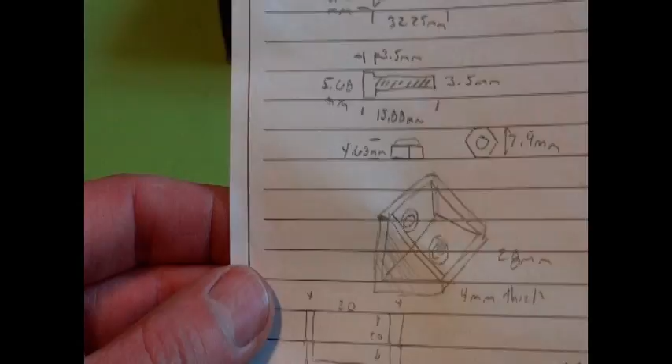So I wrote down my measurements up here so I know how big my holes are going to be, and how big the flange is on the wood screw. And I made a little sketch of the bracket I'm going to try to make. It's just a little right angle bracket with some sides to make it a little stronger. And I just came up with some measurements.

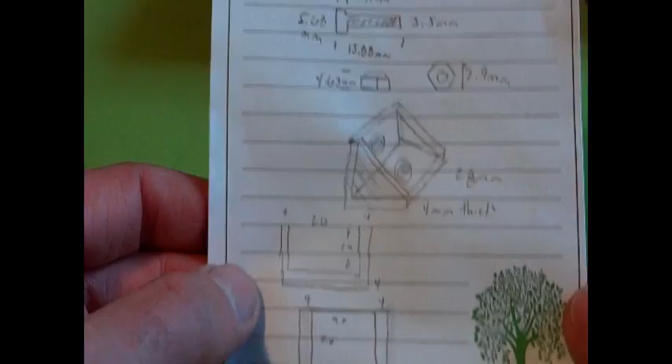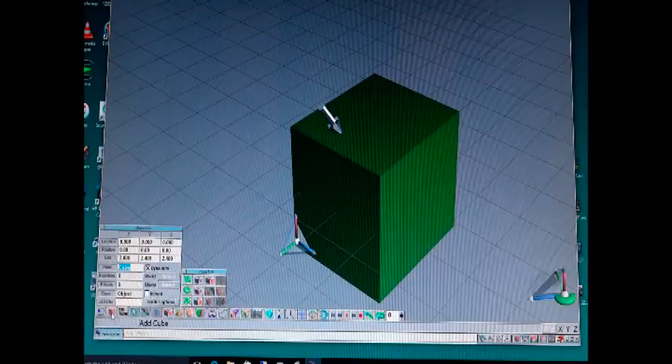Okay, now we make the object more formal by entering in some of the coordinates. 2.8. So that makes the basic shape of it. Then I'm going to cut away a section of it to make the indent.

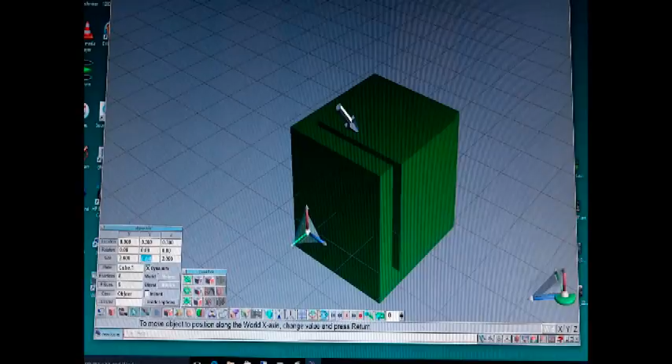Now we can subtract this. So we take the first block and subtract it from the second one, and now we're starting to form the bracket.

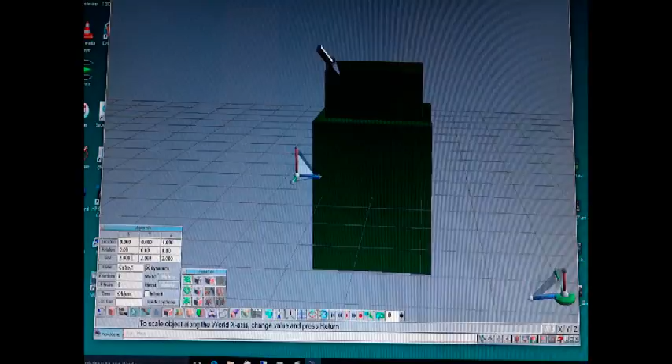Next part is to make the nice angle sides to it. So we'll add another cube, nice and big. Make it so we can see it a little better.

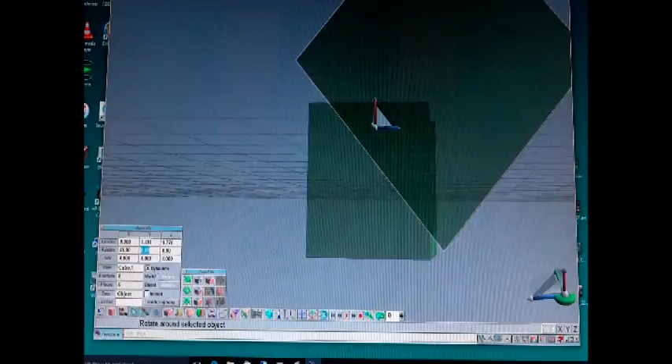I want to rotate this around to get that angle. I want to try to get these to intersect it nicely. Slide it back some more.

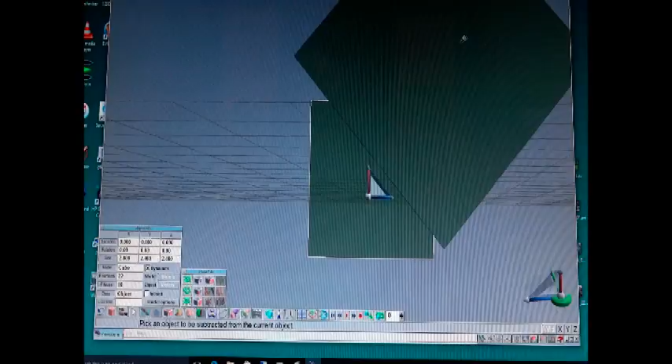This looks good, so I'll subtract that away too. Now you can see it's starting to form that shape that we drew a while ago. Just need to add the holes.

So this is the software that's used to print the parts. I loaded 2 of them because it just takes a little bit longer to print 2 than 1. You can kind of rotate around and see how it looks. There's just 2 back to back.

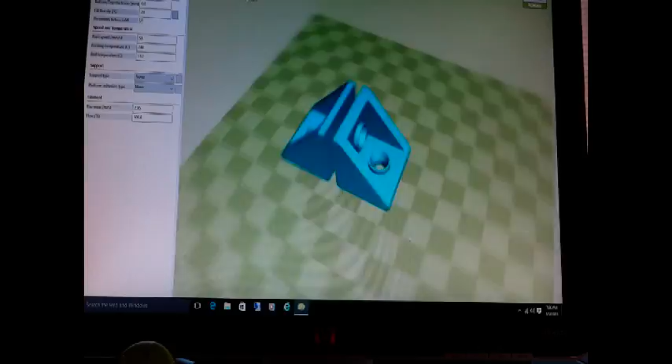But one thing this software does that controls the printer is it slices the 3D model into little slices. If I change the view here, you can see the little layers that will come printed out. So it starts at the bottom and starts working its way up.

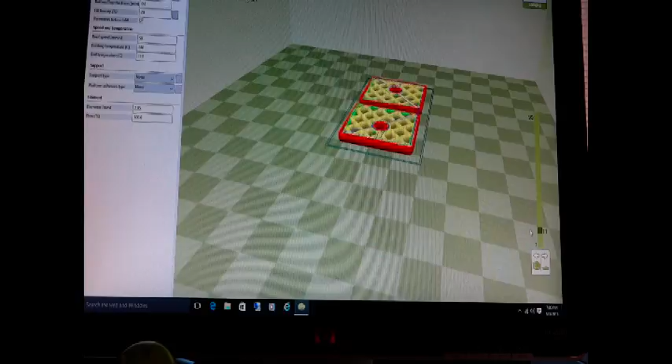So there's solid layers on the very bottom, but then it starts making a little pattern here. It's actually hollow, so it doesn't use a lot of plastic, but it's still nice and sturdy. So as it prints, it'll just work its way up, just like that.

Alright, starting to make some progress. Starting to look like a bracket finally. Let me zoom in here a little bit, maybe you can see better.

That's better focus. You can see the flange is printed out for the wood screw, and now it's just working the sides up, and hopefully it'll get a little higher and make the next hole for the other angle.

Alright, it's making progress. Back wall holes starting to take shape here. Let me zoom in a little bit.

It's probably 2/3 of the way done. It's making progress.

Alright, getting pretty close to the end here. See, the hole's completely finished printing. Got both holes there. Now it's just working on the very top of it.

And you can see we got 2 parts forming. Just a little ways to go.

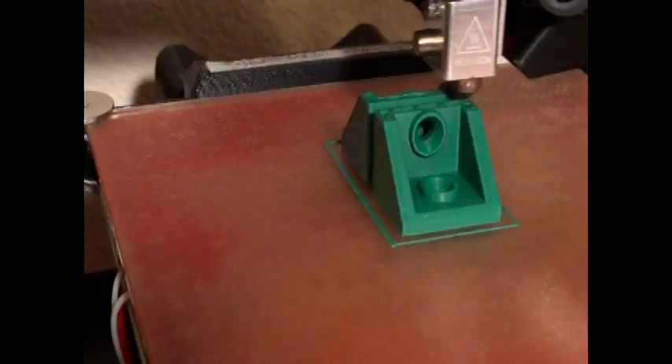Let's go back out here and see where the filament comes from. It's on a nice big spool. It's hardly using any.

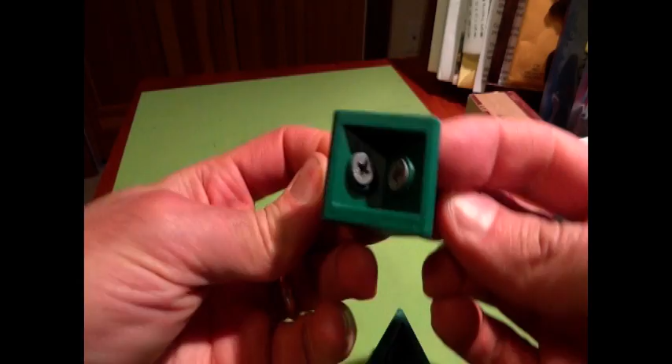Alright, so here's our finished printed parts. Let's see if the screws fit in. Looks pretty good, should be ready to install. So not bad, from a drawing to a real part in my hand.

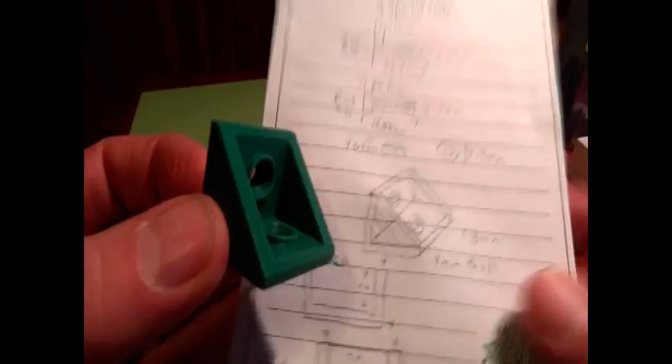Alright, got the brackets screwed in now, and nice and sturdy. So there you have it.

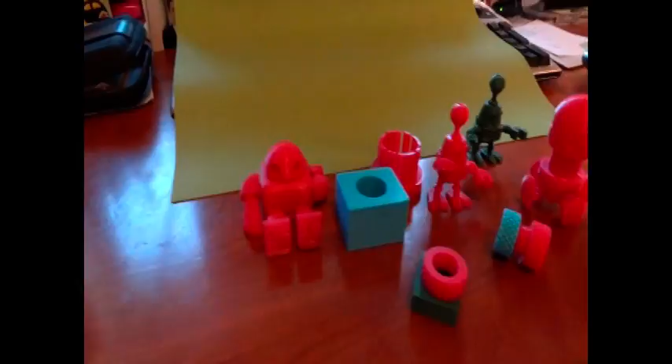Here's some other parts I printed over the last few days. There's a little MakerBot guy, and just a little practice box with a hole in it. A box, a little nut and bolt. And little robot guys. And strange...